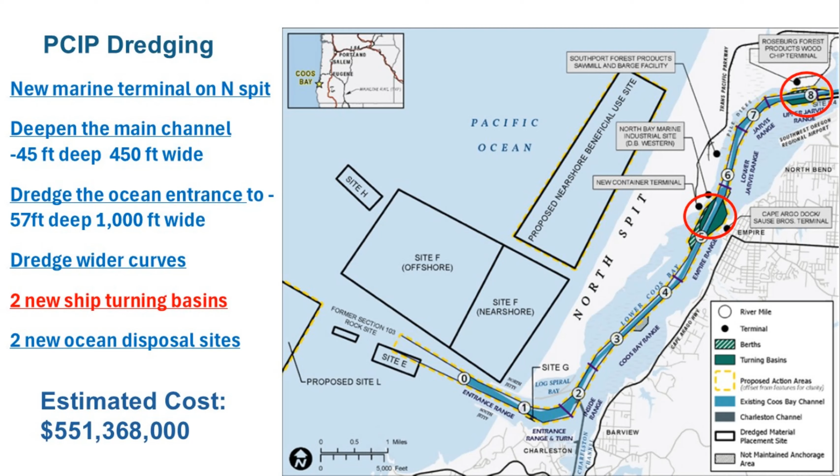Well, one might ask, Coos Bay already gets really big ships. Why propose a bigger channel? Jan has already alluded to the fact that the terminal is being designed to handle 2 million TEUs a year, carried on 3 ships a week designed to carry 13,000 containers each. Now, those are big ships, but they're no longer the biggest ships. In fact, more new vessels being built are bigger than the 13,000 TEUs that we're proposing for the PCIP.

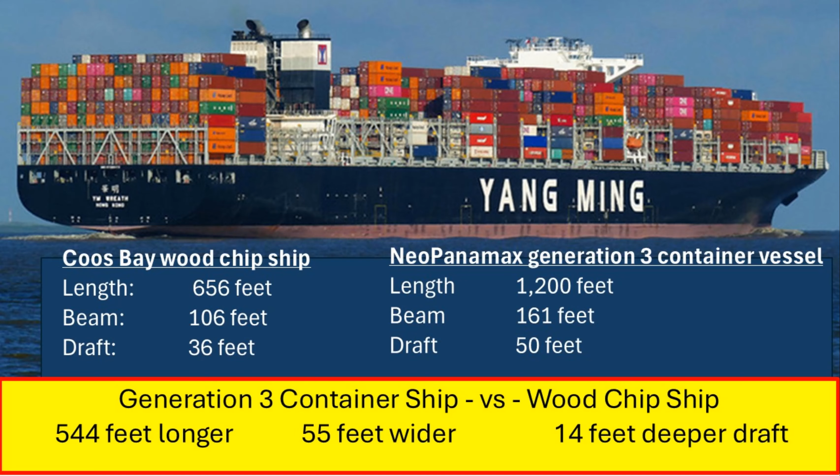So the Coos Bay woodchip ship is 650 feet long. A Neo-Panamax Generation 3, which is the design vessel, is nearly twice as long as the chip ships in Coos Bay. They have a considerably deeper draft as well. That's a big ship. It's hard for me to understand how much bigger it is because I think of the chip ships as big ships. So I thought, what about another big ship? How about a nuclear-powered aircraft carrier?

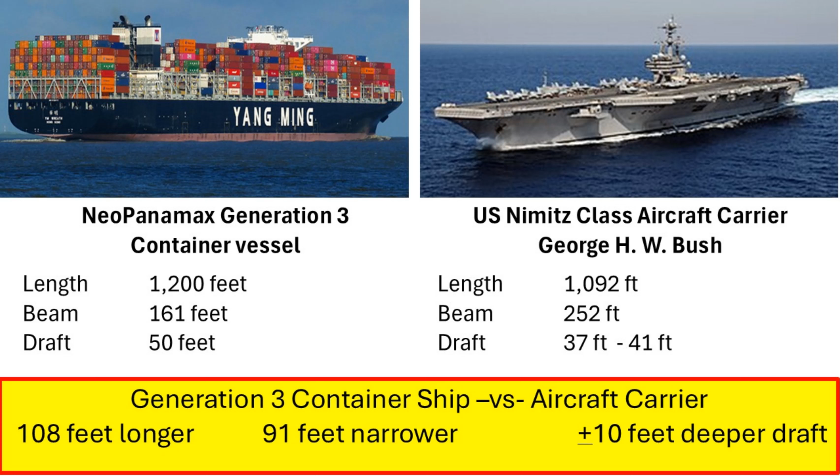The U.S. Navy has a fleet of nuclear-powered aircraft carriers. This is one of the more recent ones, the George H.W. Bush. And you can see that the proposed PCIP container vessels are 100 feet longer than a nuclear aircraft carrier. They're narrower because they need to be able to fit through the Panama Canal. And they actually have a deeper draft than an aircraft carrier.

That upper turning basin at River Mile 8 is being designed for a vessel called a Cape-size bulker. These are big bulk vessels that are too big to go through any of the canals. They are called Cape-size because they have to transit around the Cape of Good Hope and Cape Horn. They're about 900 to 1,000 feet long, and they have deeper drafts because they're designed to carry really heavy, bulky material like iron ore.

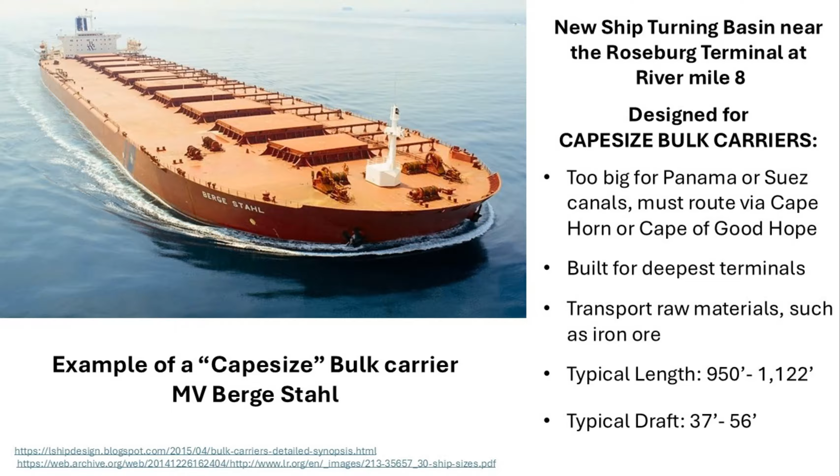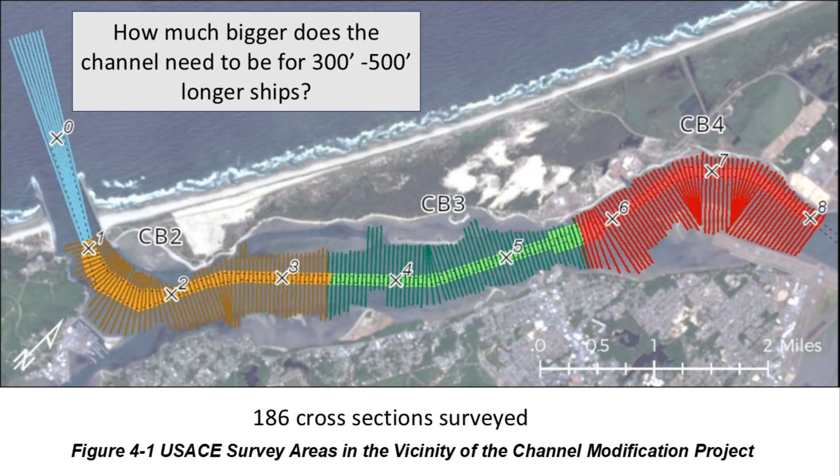So this stripy diagram shows 186 surveys that the port commissioned. A boat goes out with sonar and makes a map of the depth of the water as it goes back and forth across the channel. So we have 186 sections of the bay where we can see what the bottom looks like. Once you have that shape, you can turn it into a computer model and simulate a deeper, wider channel with different specifications.

And the Port of Coos Bay has enlisted the port pilots to go back to this East Coast simulator and run a variety of different vessels through a variety of different channel configurations.

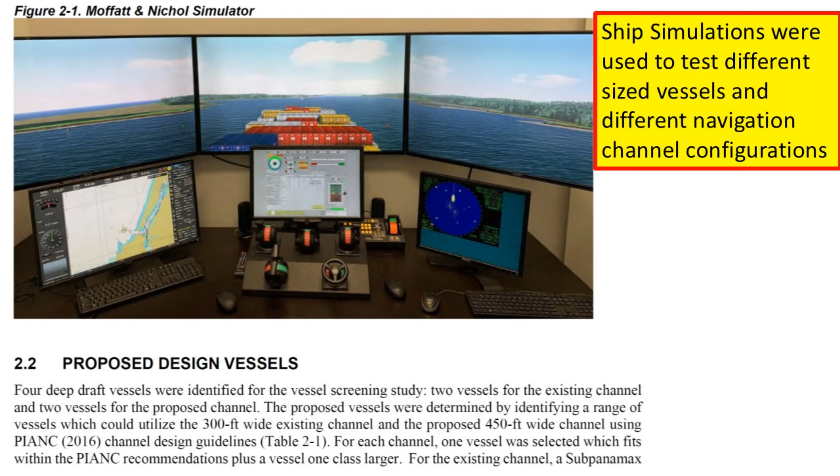And the end result of these studies has come up with what's called the preferred alternative. So here's what a cartoon picture of one of those cross sections might look like. The water level in the bay goes up and down at high tide and low tide. And because you want a ship to not run aground, the depth of these navigation channels is measured below the average of the low tides.

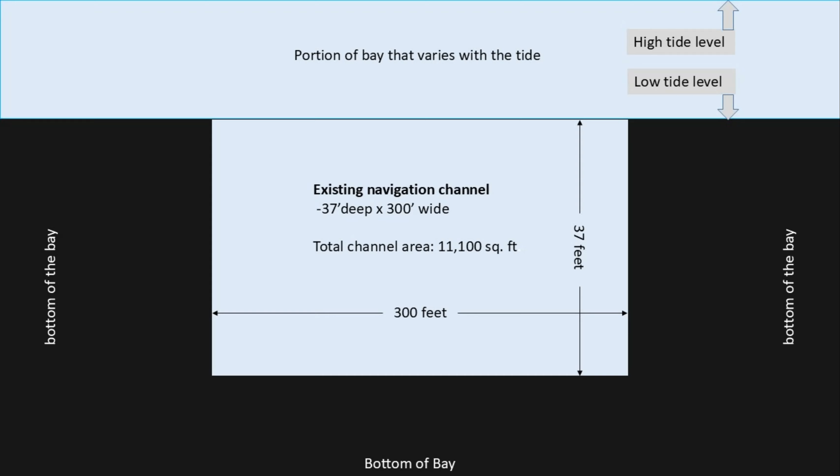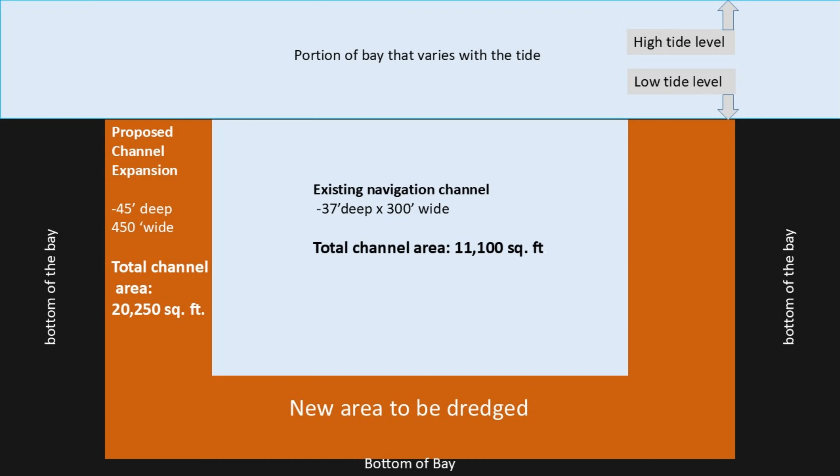So in our case, the current navigation channel is 37 feet below low tide, and it's 300 feet wide. So what's being proposed is to excavate more of the channel bottom, the area shown in orange here, and that will create a deeper channel and a wider channel that's 45 feet and 450 feet. You'll note that the cross-sectional area of the expanded channel is roughly twice the size of the existing channel.

One of the things that we learned the last time that we expanded the navigation channel from 35 feet to 37 feet is there's rock that underlies the sediments in the estuary. And it's very important to understand where the rock is and how much rock will be involved, because it's far more costly to dredge bedrock than it is to dredge sand. There's different methods required. So for cost estimates and volume estimates, these studies were important.

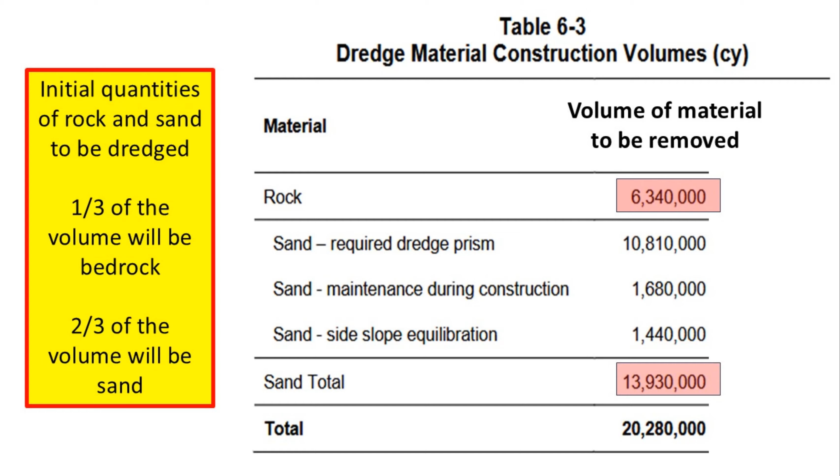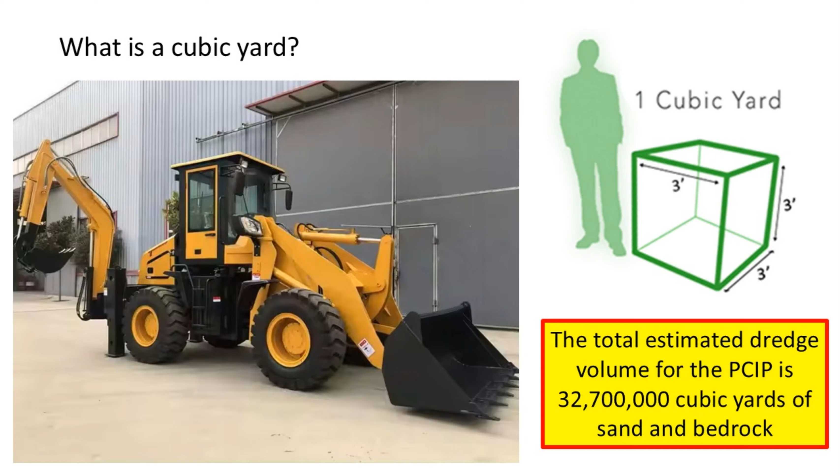How much is a cubic yard? Well, it's a big scoop from a big backhoe. It's 1 yard, 3 feet by 3 feet by 3 feet. It's a measure of volume. The port's studies estimate that there will be 32,700,000 cubic yards. So that would probably wear that backhoe out in the process. That's such a big volume, I had a hard time trying to understand how much that is.

32,700,000 cubic yards is enough to fill Autzen Stadium to the brim 7.5 times. If you put it on a train, you could load train cars full of sediment, and that train would start in Coos Bay and would stretch to Vancouver, Washington.

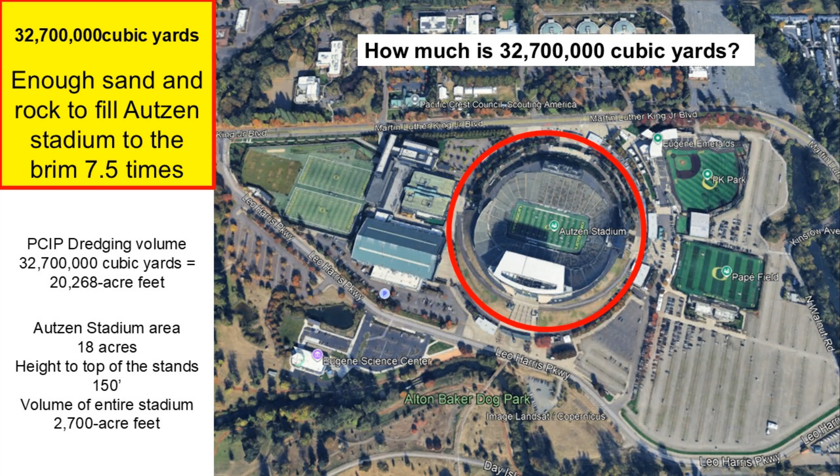Where are you going to put all this material? In order to dispose of this material, the plan is to dispose of it in the ocean, and 2 new dredged material disposal sites are being proposed. One off of Shore Acres in Sunset Bay, and the other one along the North Spit. The area that's involved is about the size of the city of North Bend.

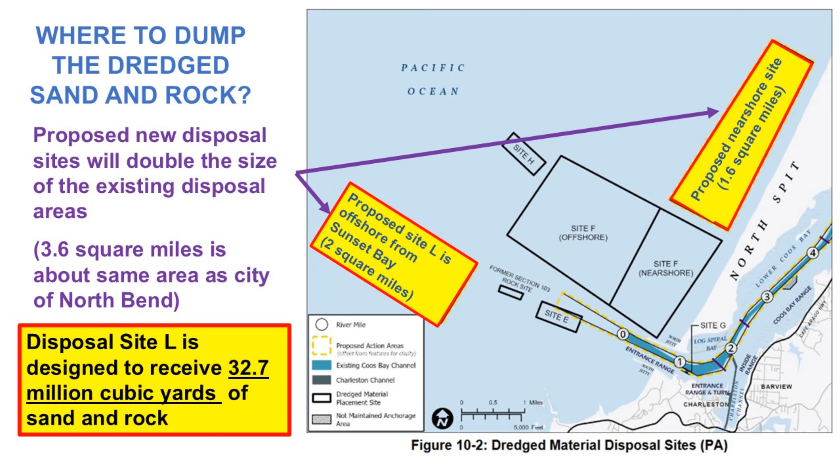So what will happen after you remove those sediments? Well, I've listed 7 items here of things that will change in the estuary and the ocean. I only have time to highlight a few of them, and I'll start with sediments, but I'll talk a little bit about water, as well as perhaps one or two slides for living conditions.

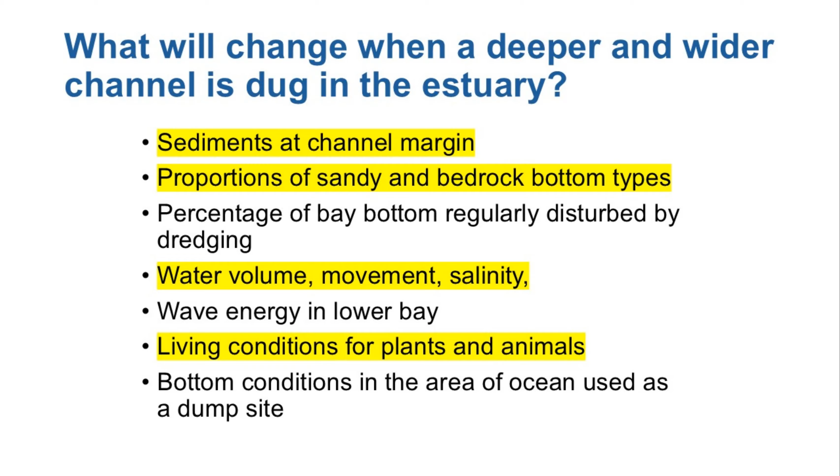You will recall that little cartoon I showed you, the navigation channel. Our existing navigation channel is the orange box in the middle, and you can see the blue shaded area is the bottom. The proposal is to deepen and widen the channel, so that's the red box, a deeper and wider channel. And if any of you have ever dug a hole in the sand at the beach, you know that you dig, but the sand fills in from the side.

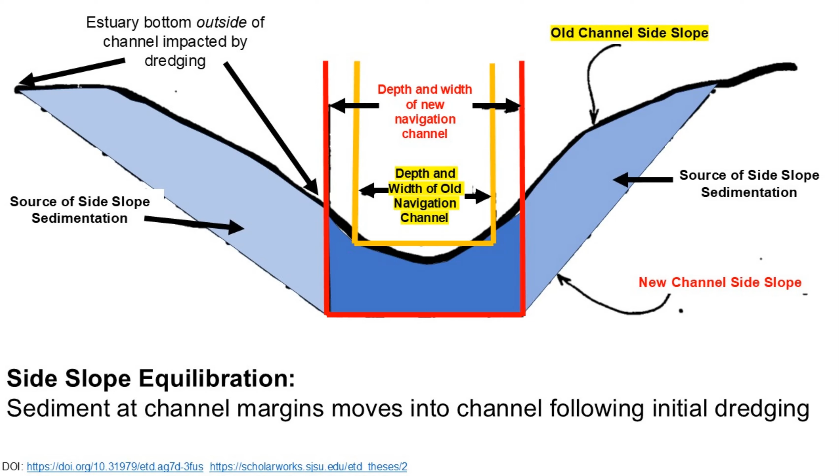The light shaded blue area outside of the navigation channel is the sediment that's expected to move in and fill in that channel from this process called side slope equilibration, which is what we've all experienced if you've dug a hole in the sand at the beach. Side slope equilibration has been studied by the Port of Coos Bay, and the equilibration areas in total, the area outside of the channel that will move into the channel in response to the dredging, is about 350 acres. And the brown and red shaded areas show where they are.

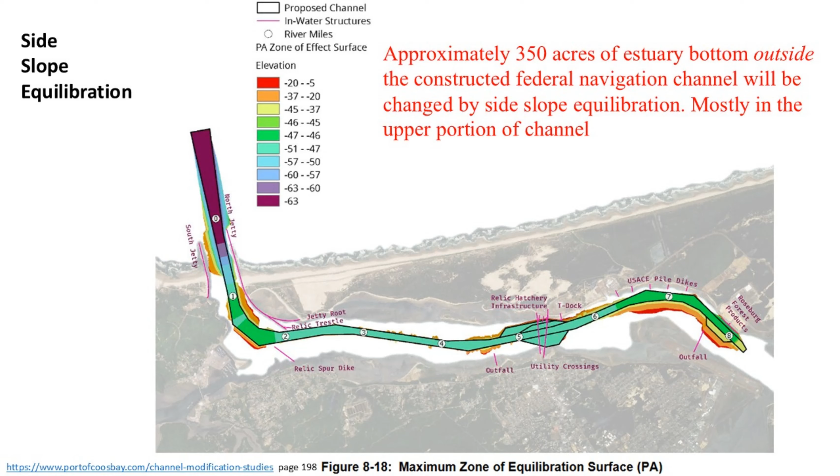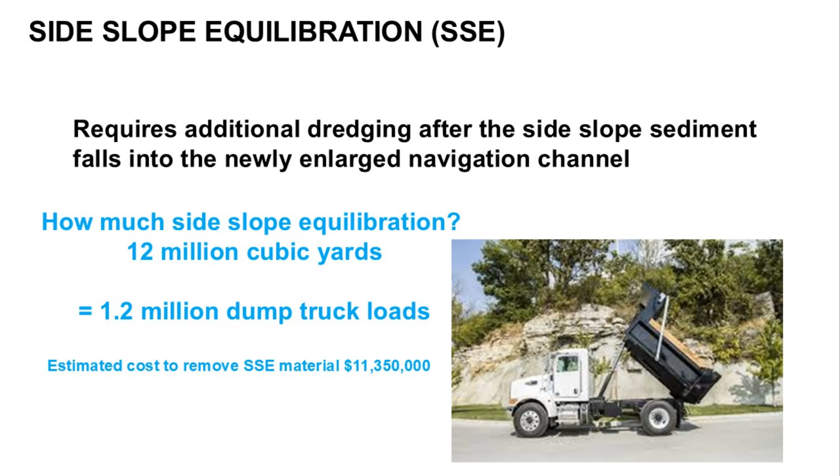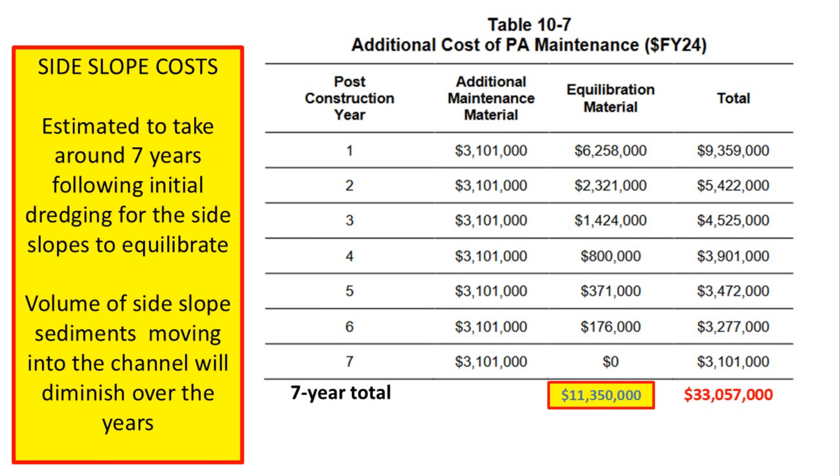It will take some time for that side slope material to move into the channel, which means it will need to be dredged on a regular basis, on an accelerated basis in the first several years until the side slopes equilibrate. And here the equilibration material costs are shown to be about $11 million, starting costly in the first year and diminishing as the volume diminishes as the slopes equilibrate.

So let's take a look up there at River Mile 8 at that Roseburg chip terminal. The peach colored area is the actual footprint of the turning basin for those Cape-size vessels. The light green shaded area adjoining that footprint of the turning basin is the portion of the bay bottom that will be mobilized and move into that area to be dredged away.

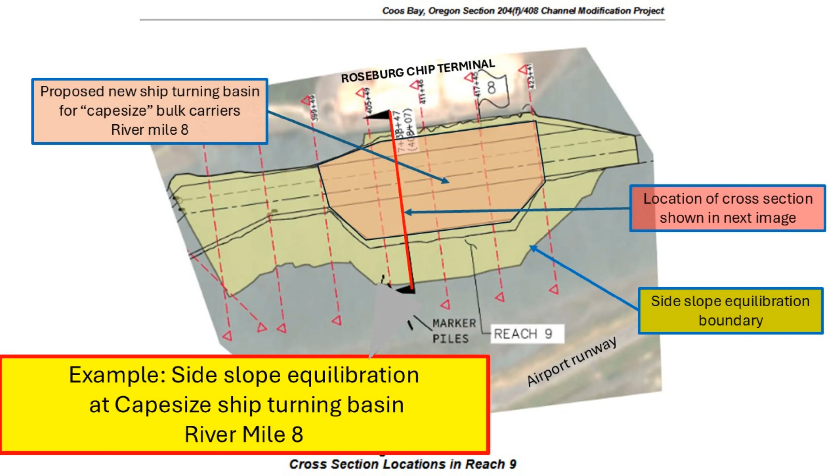So let's look at the deep red line. Let's stand at the railroad bridge and look downstream. So the next image I'll show you is a cross section that will have the chip terminal on the right, and the airport runway would be over toward the left up there in North Bend. Here's a cross-sectional area from one of the reports.

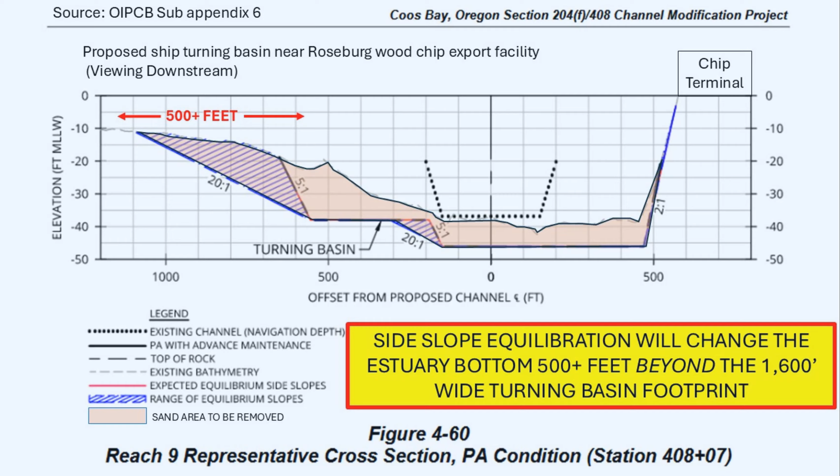You can see that in that section of the bay by the chip terminal, the channel is well dredged. That's the dotted line. And the area to the right of the channel over by the chip terminal is also dredged because Roseburg maintains that, because that's where the chip ships park. Off to the left is the turning basin. The solid color is the actual size that the turning basin is proposed to be. But that blue hatched area is the portion of the bay outside of the footprint of the turning basin that will be impacted by the construction of the turning basin.

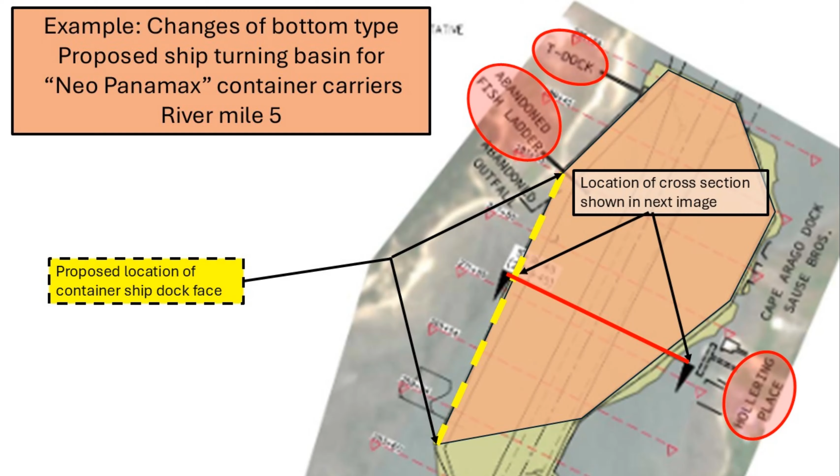If we move down the bay, we get a different story. This is the turning basin that's at the proposed terminal. The yellow dashed line is where the container ships are proposed to tie up. We've got the hollering place on the lower right portion of the screen. You can see the T-dock highlighted and the old anadromous fish ladder facility showcased there. I'll show you another cross-section looking downstream of what's going on here at the hollering place.

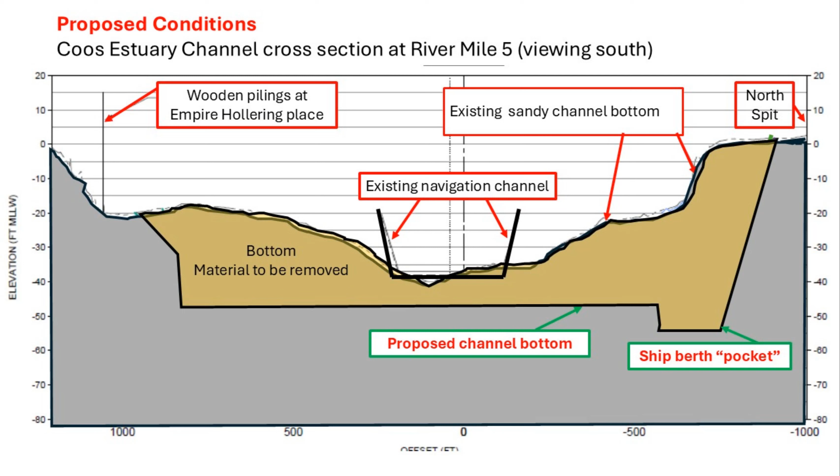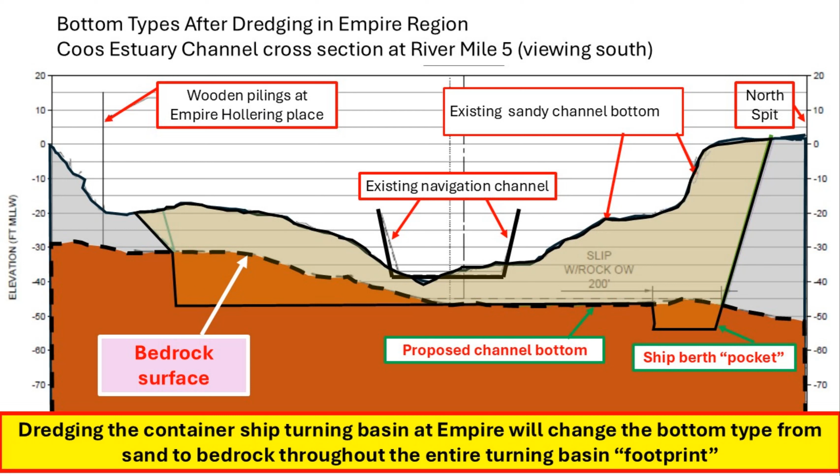Well, the big question then is what material? Remember those rock graphs I showed you? What material is to be discovered? Well, in this case, the footprint of the turning basin for the container ships in Empire at the hollering place is actually underlain by bedrock. So the area that's shown in orange here is the surface of the bedrock, and anything below that surface will need to be dredged away as bedrock. So you can see that dredging the footprint for the turning basin in Empire will turn the entire bottom of the estuary from a sand substrate to a bedrock substrate.

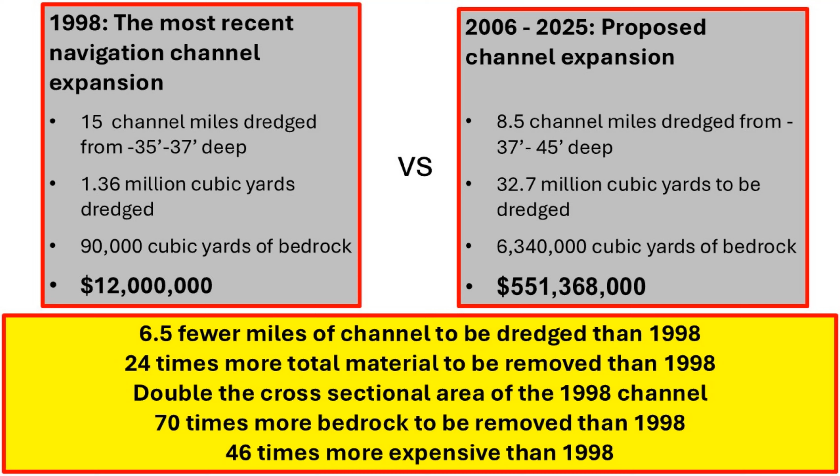So how does all this compare to what we've done already? 1998 was the most recent navigation channel expansion. We went from 35 to 37 feet for 15 miles of the navigation channel, clear on up to east side to the Georgia Pacific terminal. That cost $12 million and had 90,000 cubic yards of rock. By comparison, what's proposed here is less mileage, because we're only dredging 8 miles, but there's going to be 24 times more material than that last expansion. It, again, will double the cross-sectional area, as I showed. There will be 70 times more bedrock to be removed than in 1998, and it will be 46 times more expensive.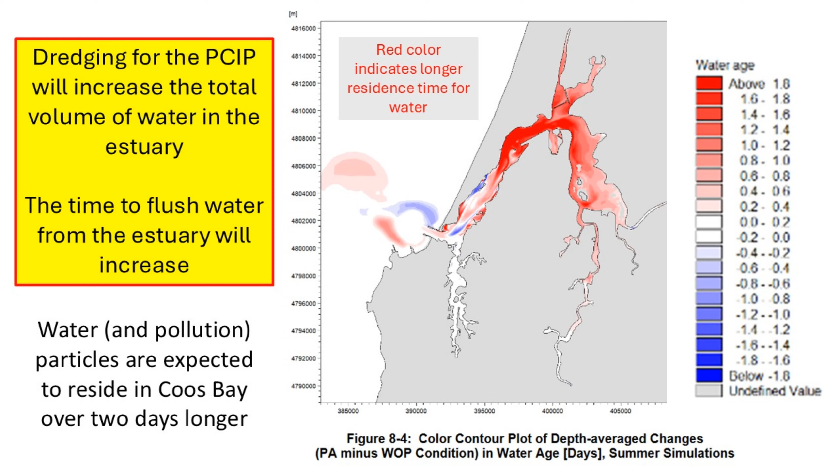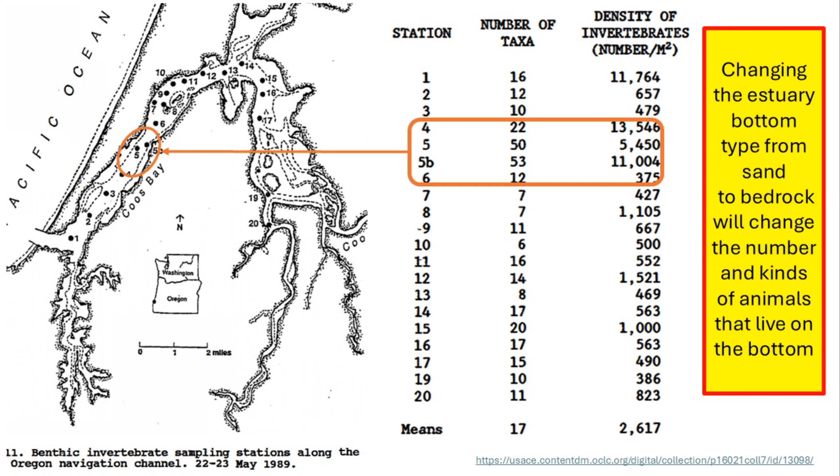One slide for biology. This is the container terminal, a study done in 1989 for a navigation channel project then. The central column shows how many different kinds of animals lived in the sediment, and how many were found in each square meter of sediment. So it turns out that section of the bay back in 1989 was really important for marine animals that lived in the bottom. Certainly when we change that bottom under that footprint in that portion of the bay from sand to bedrock, it will change the kinds and the number of animals that live there.

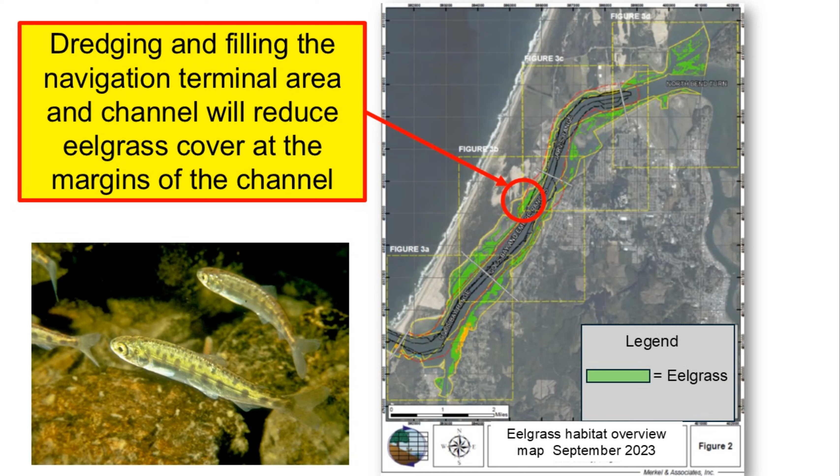Finally, a number of people have shown a great deal of interest in eelgrass because it's very important for a variety of reasons. And I will just say that eelgrass lines the channel. Green showing here is eelgrass in this map. And the dredging and filling for the terminal, as well as the dredging along the margins of the channel, will decrease the amount of eelgrass.

So that's it for me. In short, 3,500 pages in 15 minutes. Thanks for your attention. We'll turn it over to Christine.